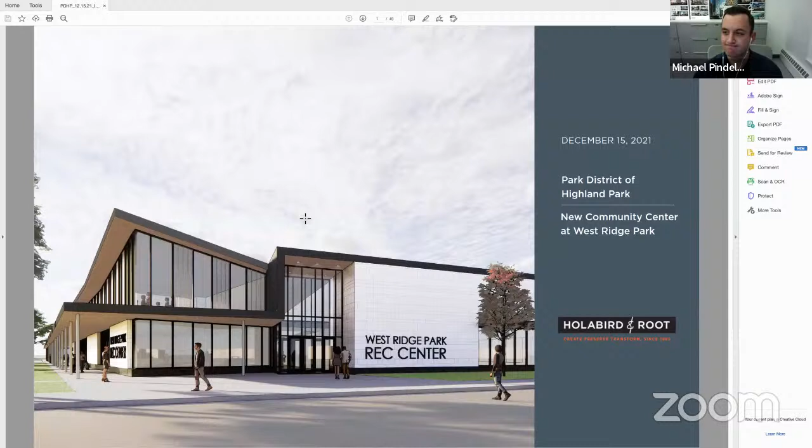Let's go to the next slide, please. So essentially, we appreciate the prompts that we were given, and we've reordered them a bit from the email we received. In our agenda for this evening, in the next 15 minutes we'll talk about our approach to working with the Park District, including engagement of stakeholders for both the site and building design.

We'll talk about our analysis process of the site, of the existing location or a different location. We're going to show you relevant examples, and then we'll head into the pros and cons for renovating the existing building, building new on the existing site, or building new on a different site.

Next slide, please. Our expectation is that as we go through this, if we need to double back on something, we can certainly do that. Essentially, our process does a number of things. In the multitude of boards that we work with, this is really a verification and validation of our approach and where we end up in the process.

So it is our intent to analyze all the different site options, and there may be some sites that you have thought about that we have not discussed or may not be aware of. We make sure we understand the overarching goals of the building and accessibility, understanding that those are influenced by the site. In our process, we look at development costs, traffic, community impact, et cetera.

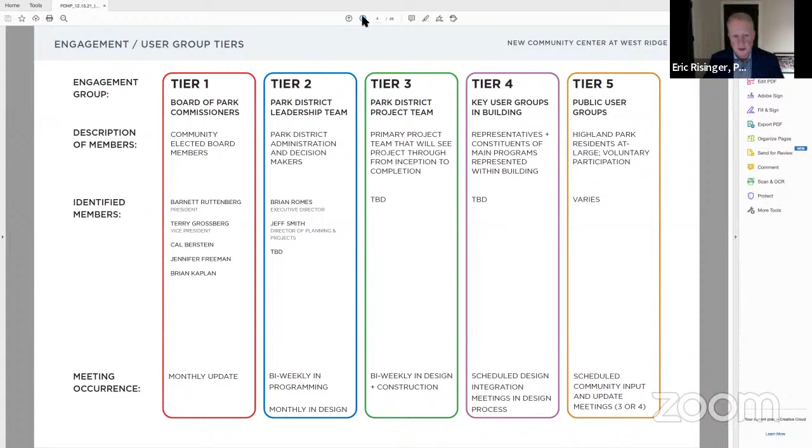Next slide, please. In terms of engagement, we typically break down our potential public client user groups into tiers. Tier one, as we see it, might be the park board. Tier two would be the Park District leadership team. Again, we're making some assumptions here, but this would be filled in completely, working with that key leadership in biweekly programming meetings, monthly in design.

In terms of the park board, it's really updating monthly, but in the initial phase there will be interviews, feedback, and a process where we want to understand the goals and the collective direction you would like to see, referencing the plan developed by the Lakota group, which was from 2015.

It would be our understanding it was probably started in either 2013 or 2014, with a draft delivered in 2015 and subsequently adopted. We want to be sensitive to past information, as maybe things and expectations have changed in the last few years with economic shifts, as well as the lessons learned from COVID that different communities and groups are sensitive to.

Tier three would be the Park District project team. Tier four would be our key user groups, and tier five is the public user groups. All of these involve a process of mining information through in-person meetings, workshops, and open houses, where we're making sure we're not only gathering input but presenting it back so we're building consensus.

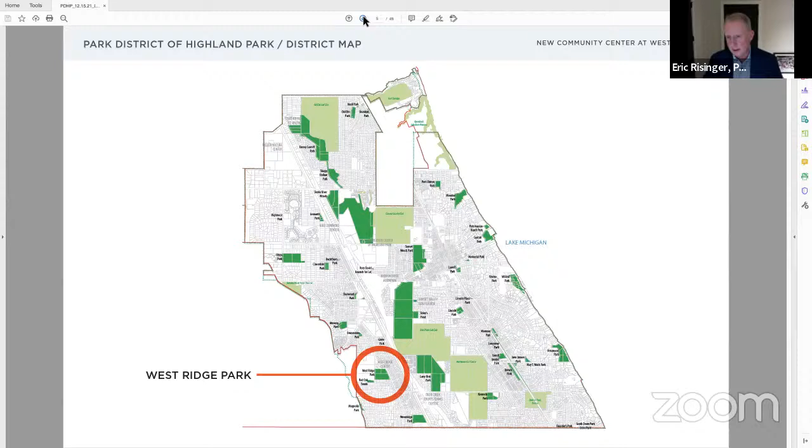So as we get into an example of what a site selection analysis and process looks like with Holabird & Root, we'd share a case study we just completed last year for Wadsworth City Schools. This has been a repeat client for us, ongoing. They had identified two years ago a need for a new intermediate school, and the challenge at the board level was: where do we build this? What site do we want to identify? And how do we do this?

We spent time to really understand utility access, roadway access, and safety of reaching these sites, because again, these are school-age children. So if they're walking here, how are they getting here? Are they walking with their families? This process, as we presented it back to the board, was really incredibly informative for them.

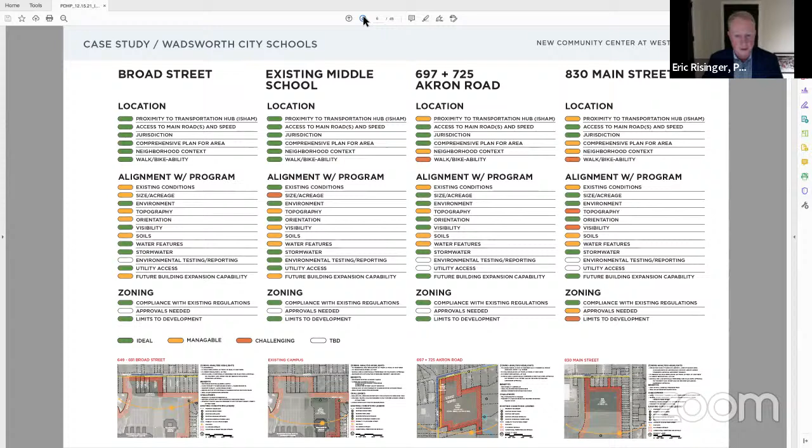So in terms of the analysis of the site, as we lead into the pros and cons: do we renovate the existing building? If we're doing new, do we do it on the same site the current building occupies, or do we build in a different location? In fairness, we do this all the time, and this is a big piece of the puzzle.

We've got to make sure we're verifying and validating information that the Park District for Highland Park may have already created in the past. We want to make sure that from a board level you feel confident in whatever decision we go down. And more importantly, the question is: how did we get here? Because a lot of times things happen and seem so intuitive, but in reality, given the start-and-stop reality of what COVID has done, we want to make sure we do that.

So what we're going to do with you this evening is take you through a very preliminary process of where we think this facility is located, and we'll give you our opinion on renovation versus new. But this is what we would typically do when working with the board. Next slide, please.

One of the things we do with all of our facility assessments—and you guys have one conducted by WT Engineering, which we have reviewed—is this: here's an example of an existing facility where we worked with the state of Ohio, and we had to verify and validate a report they had done in 2008 to determine whether the school would be eligible for full replacement. In Ohio, you have to hit a particular ratio of renovation dollars compared to new, and it's a fairly extensive process.

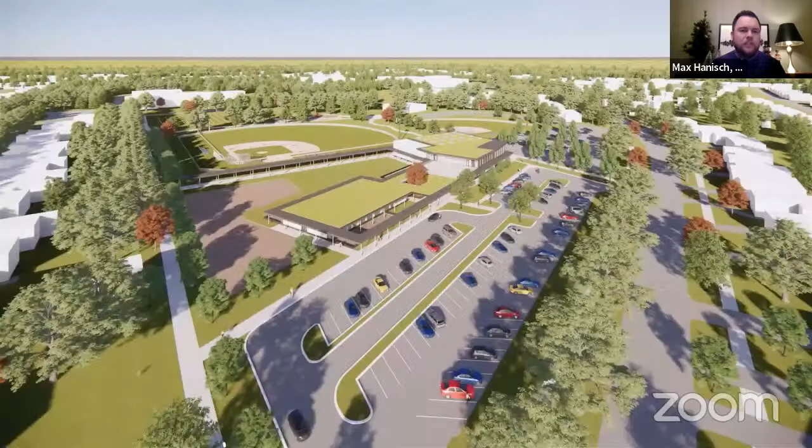As Eric was ending on the new master plan approach we proposed in our initial proposal to the Park District, we wanted to capture in its entirety what it's accomplishing with the holistic approach that was asked for, in its possible new layout—this kind of charrette or vignette of what could be. As we come along the south side of the park, what we wanted to showcase—and the video, I apologize, will be a little choppy based on the meeting platform—is an entirety of a building that sets the stage along the street front of the neighborhood.

It's an elongated, low building that has the opportunity to serve as a kind of community porch element. We'll see a couple of times how that building opens up to the street and to the pedestrian network. When we were on the site, one of the amazing things was those existing pedestrian networks that snake you through the site and along the tree lines. So what this building really seeks to do is strategically place itself amongst those pedestrian networks and find ways for extensions of the building to bolster those experiences.

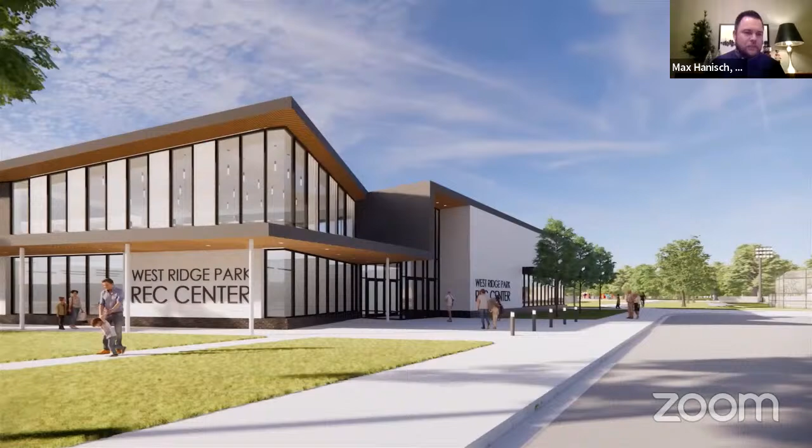So as we come into what could be a front approach to the building from Ridge, we'll take a slow pan along here and see the north possible rec entry to the building. We see the dance studios and the art programs up on the second floor, and that key administration space along the first floor.

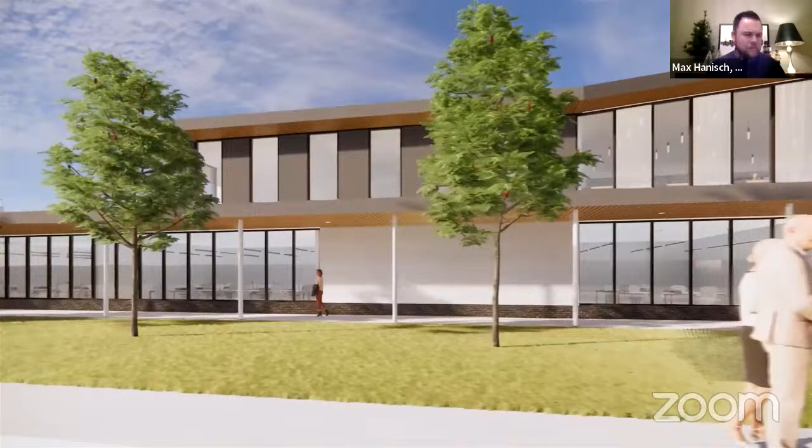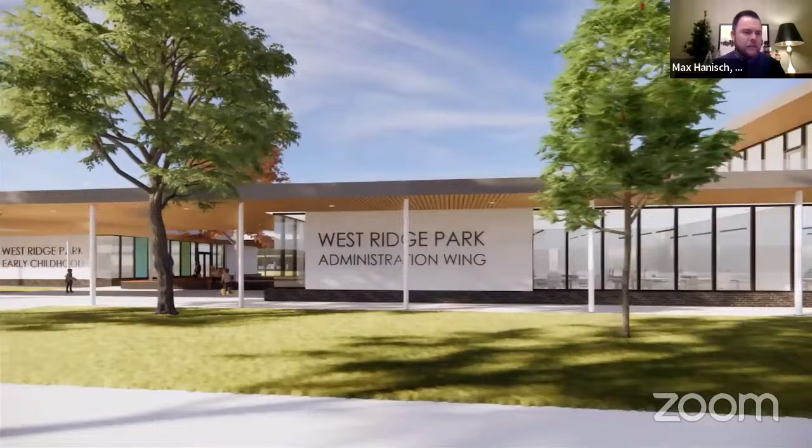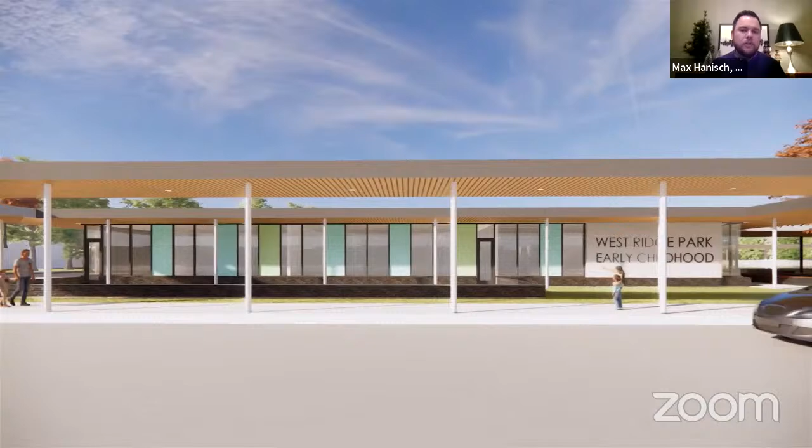As Eric was talking about, one of the integrated program approaches to this building is very similar to the multiple users that access a school building. We'll see here that breezeway open area of the building that allows us to have a natural break in space and have a dedicated front door, dedicated entry, dedicated building services to the early childhood center, making sure that we have the strongest supervision and safety and the ability for this to operate as its own entity.

And then as we move to the north side of the building, we can see into the gymnastics gymnasium that's positioned on the west side of the building, closest to the rest of the outdoor athletic programs, offering some possible flexibility between the gymnasium and the outdoors.

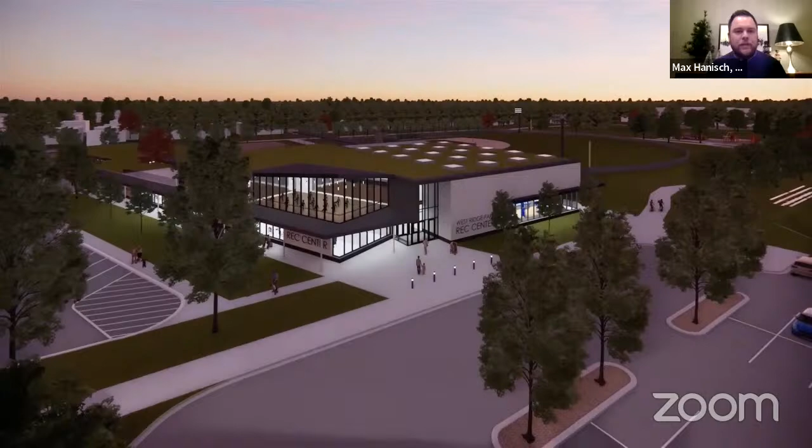And then finally, that main entry again that we're back at, that takes the covered walkway of the pedestrian network and starts to wrap that covered walkway up to become part of the integral architecture of this new rec center and community center. And then finally, as we pull back, we can start to see on the second floor inside that dance studio space that really has the opportunity to be kind of that beacon for the park district.

And I think all of the things that we've been talking about, whether renovation or addition or building new, there's a series of really good planning principles that Holabird & Root knows like the back of our hand: making sure new interventions are based in a pride of place, have supervision and safety thought through for approaches to the building and parking and access, making sure these new facilities cover all things wayfinding and landmarking with the multiple user groups on the site.

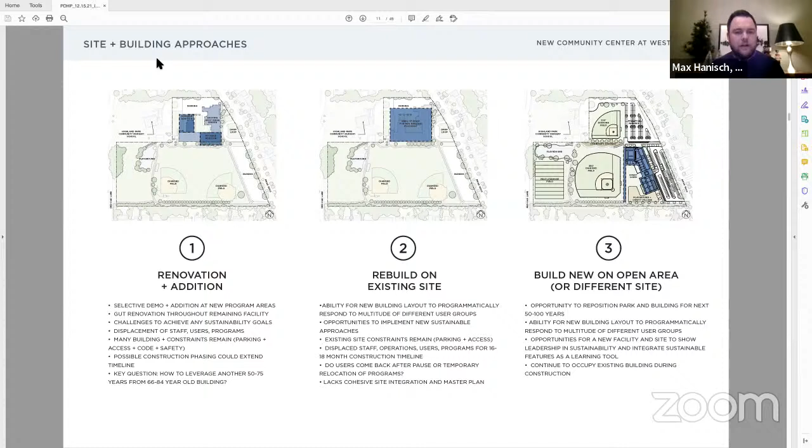Are looking for every opportunity for instituting sustainable measures, whether that's in the formal building or in the site approach and stormwater management, and using those really as a teaching tool. And then finally, the operations and maintenance, as Eric was starting to hit on, making sure that we are bringing to the team all of the possible mechanisms so that new operations and maintenance are going to be simple and efficient for the district.

Thank you, Max. And I think what we were trying to do is outline for everyone here our process of working with you: the verification and validation of data, looking at the real dollars, looking at a comparison and benchmarking of energy modeling of new versus existing. So this would be the process that we would work through.

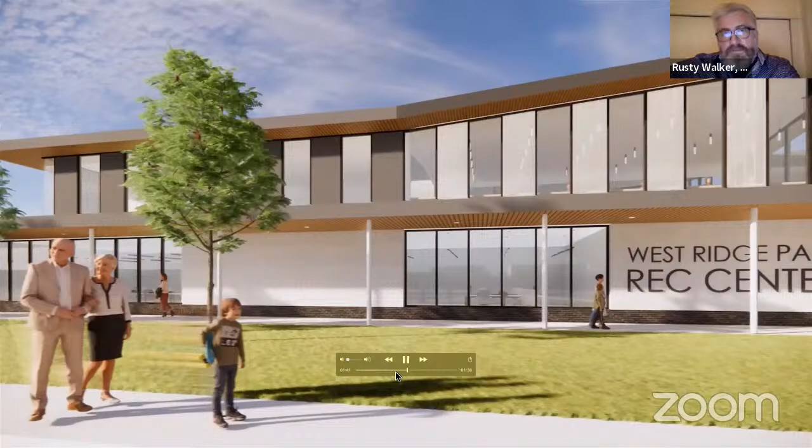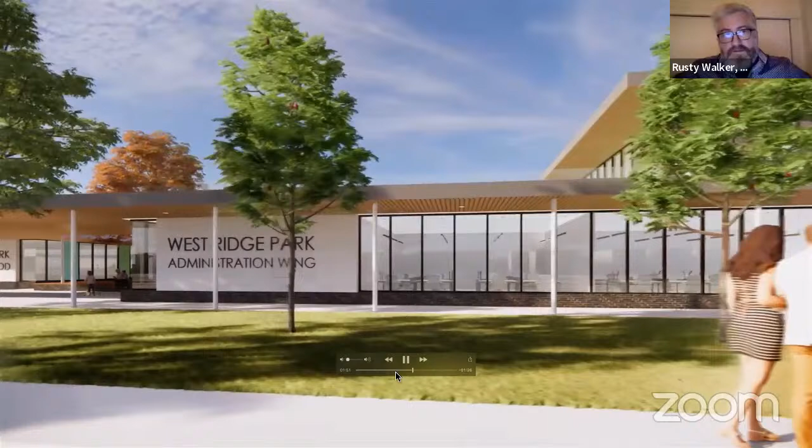Okay, can you keep going? So what you're seeing is the artist loft on top—the dance studio and art studios sit above as a loft. The administration and conferencing is below. You can also see this concept of an outdoor classroom, a porch. The whole building is united by this low sweeping porch, or arcade, right here.

So now am I looking west? Still, yes. All right, so we have the administration—some of the folks on this Zoom right now—this would be where they'd be housed. Got it, okay, keep going.

We did that so the administration is sort of a passive supervisor for the early education—not actively, but they're able to survey and control the site from there. Right, so now we're in the old parking lot. Yeah. Okay, now I've got a better sense of it. Keep wrapping around, so now we're still looking west, and then it's gonna loop around.

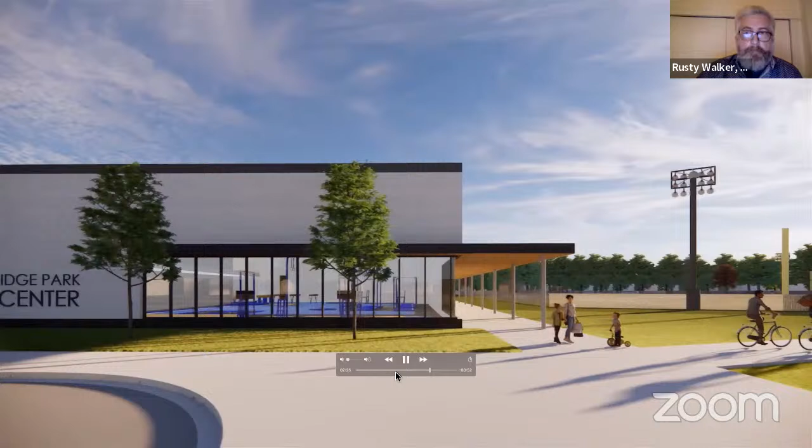Okay, now we're looking north again. Is that what—south? Okay, stop it for a second. Oh, I see, so now we're on the other side of the building, on the north side looking south. Exactly. Okay, this is where I lost you. Keep going—animations can be a little disorienting.

Okay, so there's a parking lot now that allows access to this north entrance. Right, that's the recreation athletics parking lot that's going to have to accommodate big events, small events, and daily uses, so it's separated for that purpose.

Okay, so unequivocally, you are recommending that we take this down and build new in this new spot. We are. And I think it's important to add that when we designed this during the design charrette or design competition, we built a cost model. So we're recommending something we believe you can afford based on your budget, and that's something we do because we're principally school designers. School districts, I'm sure you know this, do everything they can with paperclip and bubble gum, right? And that's what we do. But we make it beautiful, operational, and maintainable. We're very good at figuring out how to get a great building and a rich program out of a modest budget, and we don't show you or promise anything unless we know we can deliver it, so the cost is realistic.

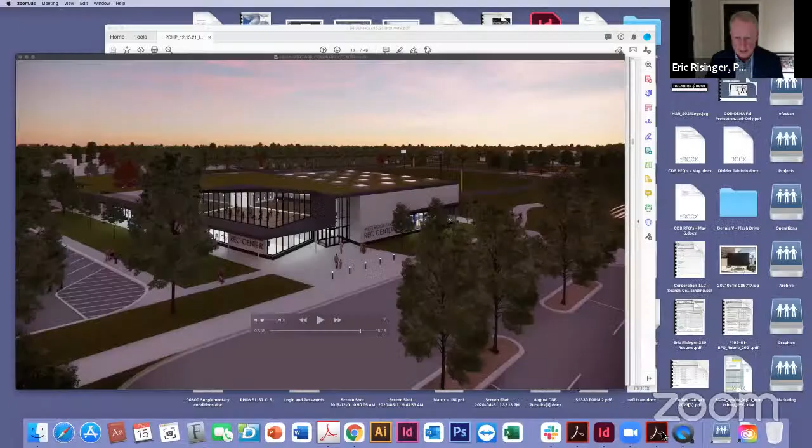Yeah, Cal, can we go back to the animation? We just want to show you something pretty impressive. The park was absolutely part of our design. Mike Pendelski, can you call that up? And if you can go to the aerial, that would be important.

Yeah, at the beginning just swing around a little bit. Hold right here—two things are occurring. We have the event lawn—Mike, if you can circulate on the event lawn. So we have the event lawn, which is critical. Mike, just put the cursor on it.

Right now we've already anticipated a controlled outdoor environment that could be programmed by the park district, which could be amazing. We have the playground, the event lawn, which we're putting in almost every one of our projects. At the same time, that west covered area—what we love is, because we've all been outside when it's snowing watching baseball, now you could be under the roof. In summertime when it's really hot, the sun was amazing this past year, you can be in shade watching the baseball games. Mike, now just let the animation play.

What has been really impressive for us is acknowledging that. So Rusty, do you want to add anything to that?

Well, you have a beautiful park, and what we wanted to do was preserve all the things we thought were beautiful and successful about it. We all went for a walk around the paths, and they're amazing. That was one of the informing components of the site for our building concept—that our building would organize and connect all those pathways and experiences, as well as preserve the beautiful little park. I don't know, Max might know the name of it. I can't remember the name, but that's a special little space, that park over on the west side.

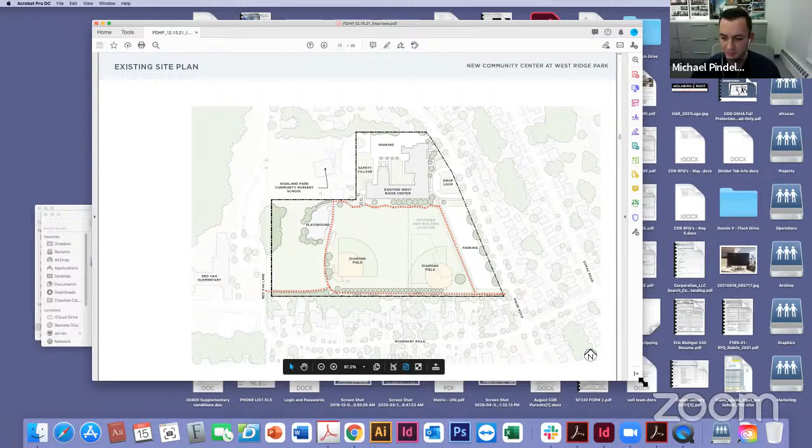I don't know if I can tell you the percentage, but Max, why don't you just pull up the site plan and we'll show you where we repositioned it. Mike, can you pull up the site plan in the appendix? Are you looking for the existing site plan? No, the new one. It's just a couple down from that. There you go, this one right here?

Yeah, there you go. So the interesting thing about the site plan layout is that we've really swapped building footprint locations. Where the old building was, the diamond field and additional lawn gets implemented. The event lawn may be equal. The one thing that makes me hesitate a little is we're showing an expanded athletics parking, where the first number on the top side of the site plan shows accommodation for the multitude of new users we're expecting to come to the site.

But all of that needs to be balanced, it's not a further study, just a guess. Sorry, Max, go ahead. I think that's really the summary, Rusty - there is a small increase in parking on the site, and a little bit of green space is converted to pavement, but I don't think this is necessarily the final solution without additional data.

Through the new field designs, we have the proper orientation for the fields now, which we feel good about, as well as the opportunity to rethink the watershed and water management on the site. But these tree pathways and the park, we worked to make sure all that is preserved because we think it's unique and beautiful for the park.

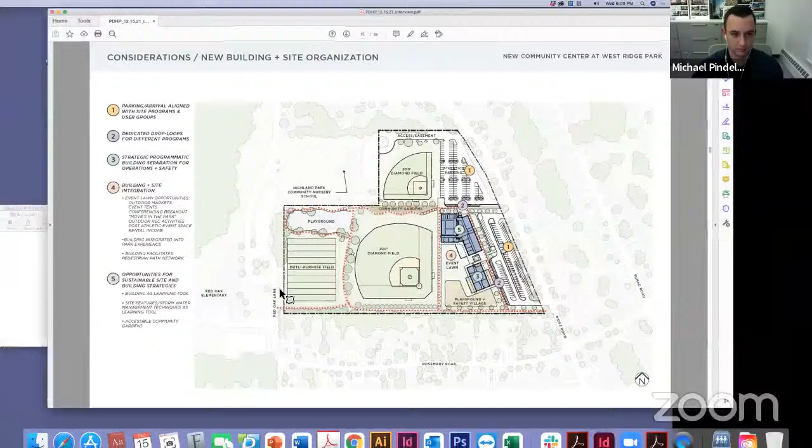Well, let me ask it a different way - is this materially bigger than what we have? No. What we did was, we took the recommended program that we received and integrated that program. Mike, can you give Max control and he can just go to it? Oh no, it's okay, this is good. But essentially, we're looking at about a 44,000 square foot building here that we think works more efficiently with what you need. I don't know the exact square footage of the existing facility.

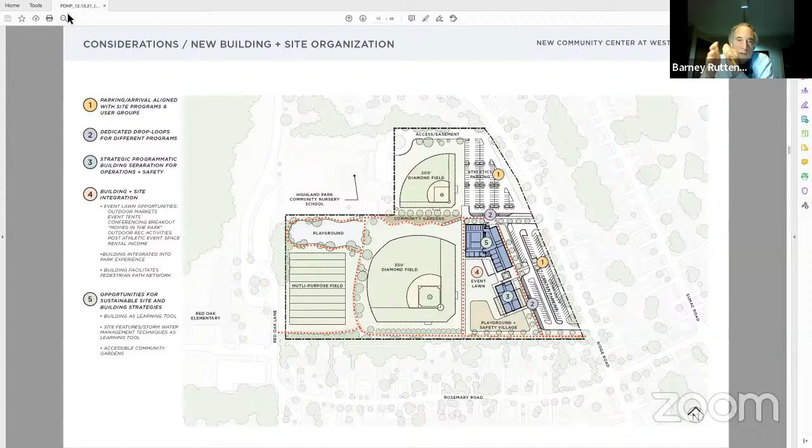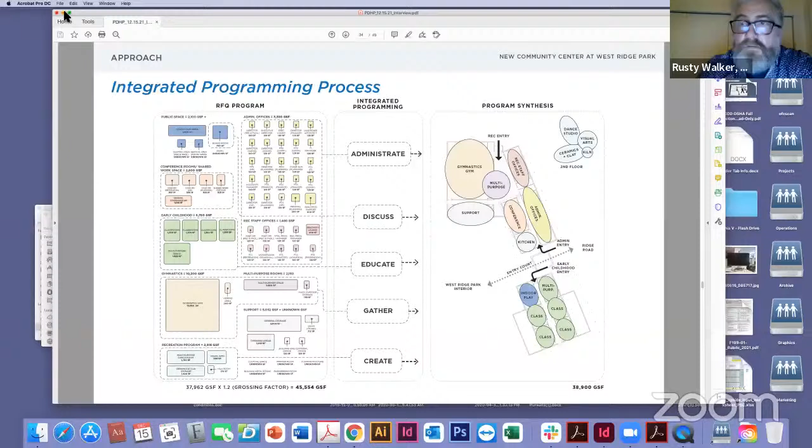Okay, well that's fine, but let me ask: are you programming it to have a basketball gym, or just a dance studio and a gymnastics facility? Currently, as the program requested, we have a gymnastics gym sized in there. Could you raise the height of it potentially and have the versatility? But because of the equipment gymnastics requires and the specialized flooring, switching that building around might be a little challenging. But if that is a program addition you want to study through the design phase, certainly we would look at that with you to see how we could accommodate it.

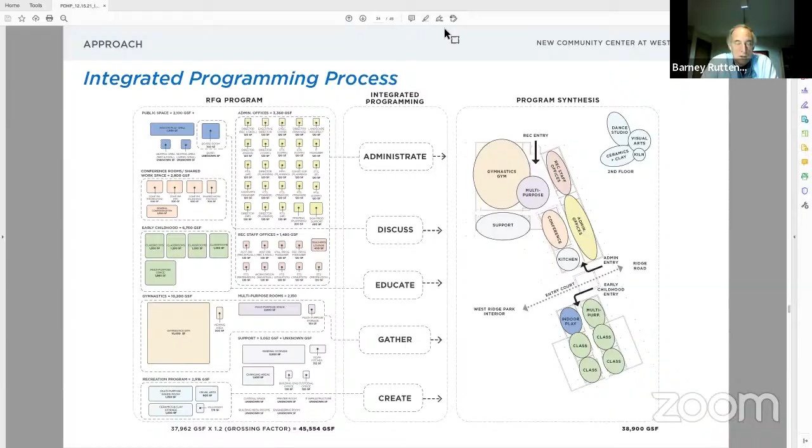Okay, well gentlemen, and I know there are some ladies we didn't hear from, I want to thank you for your presentation. I don't have any other questions. I think it's a really great concept you're presenting to us, and we appreciate the time and explanations. I hope you didn't think our questions were too baseline. No, they were great, they kept us honest. Well, that's the job we all have.

Go ahead. Great, thank you Brian. I'm going to share my screen here. Thanks everybody for having us today, back again to talk a little more about West Ridge. You can all see this, correct? Perfect. As you mentioned Brian, we're here today - Andy Tinucci, joined by Brian Foote and Heather LaHood, as well as Don Matthews from Gewalt Hamilton. Same team that presented to you at our first interview, so we thought it would be nice to bring back the same group as a follow-up. We'll keep this initial presentation brief so we can spend most of the time in the question and answers.

What we really wanted to say is that we think architecture is a service. We feel we distinguish ourselves based on the quality of that service, the level of care we provide in our work, and our thoughtfulness. A lot of that care we bring is a care about your mission. We feel that's evident in all the work we've done for public institutions over the last 30 years. I know there's a question on the table right now by the board as to whether or not you should be defining what this project is for us - is this a renovation project or new construction? I don't think it's critical right now for you to be defining that for us.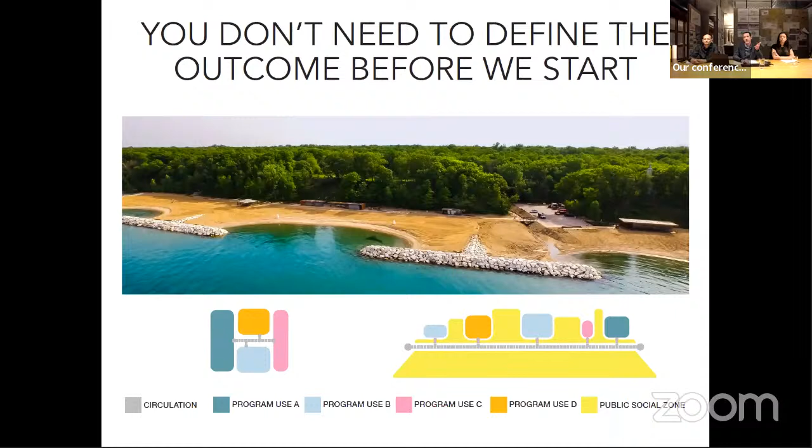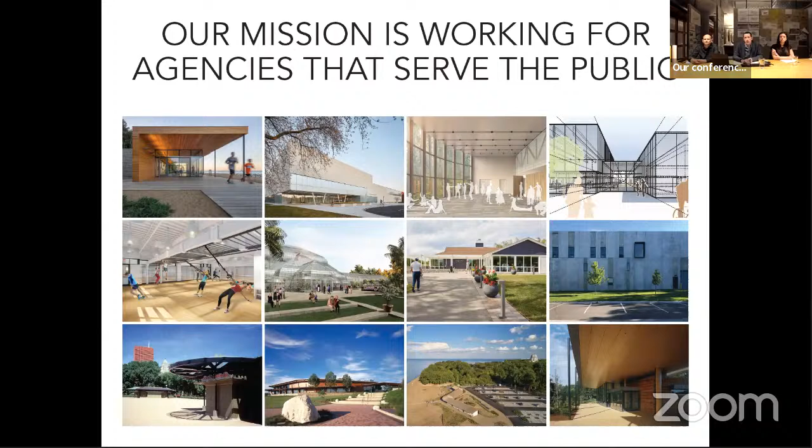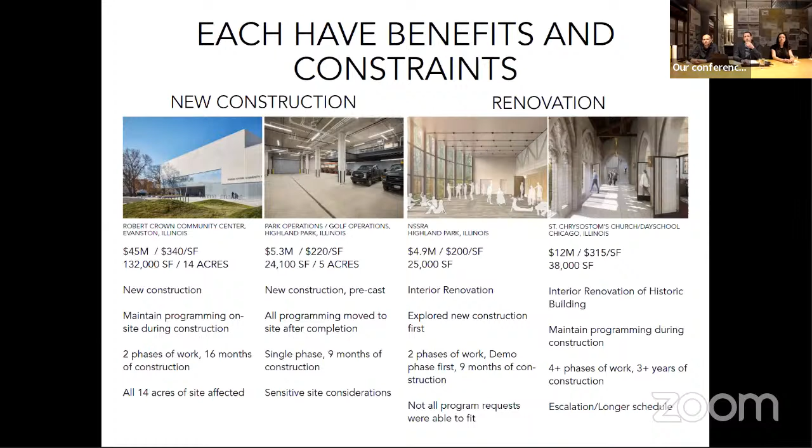I think it leads to much better outcomes, as evidenced by Rosewood, when we don't define the outcome before we start, and we let the process and the product develop through that collaboration with you. Our mission over the last 30 years has been to work for agencies that serve the public, agencies just like yours, and we work on both new construction and renovation projects alike - it's 50-50 in our business. Each has benefits and each has constraints, so whether you're working on new construction or renovation, they come with pros and cons. We want to spend a bit today talking about pros and cons, and we can circle back to any of these slides in the Q&A. With each of these projects demonstrated here, it wasn't a foregone conclusion when we started as to whether it would be a renovation or new construction. We went through a process with our clients, over a short or long period of time, to determine what the final outcome would be.

Just to jump right into it and to get more specific, if we had to list the pros and cons of new construction versus renovation: one pro of new construction is that you can design a facility that's perfectly functional for what you're trying to do. When you think about gymnastics, you can design a facility that's exactly the right size, the right height, with all the right mechanics for the uses you're trying to achieve.

New construction is often easier because you start from scratch. You have cost confidence and schedule confidence. You generally know what you're going to find with new construction, more so than with renovation when you start digging into an old building.

Also, we should consider life cycle costs and maintenance costs. When you start with new construction, you'll reduce your long-term maintenance costs and life cycle costs because you'll have the latest systems and the most energy efficient building possible.

Interestingly, across the bottom you'll see the same for each of these pros and cons of new and renovation: optics are often a pro and a con of any kind of project. With new construction, one of the pros is its optics—you spend a lot of money for your constituents and give them something brand new. The cons: there's a lot of waste with new construction.

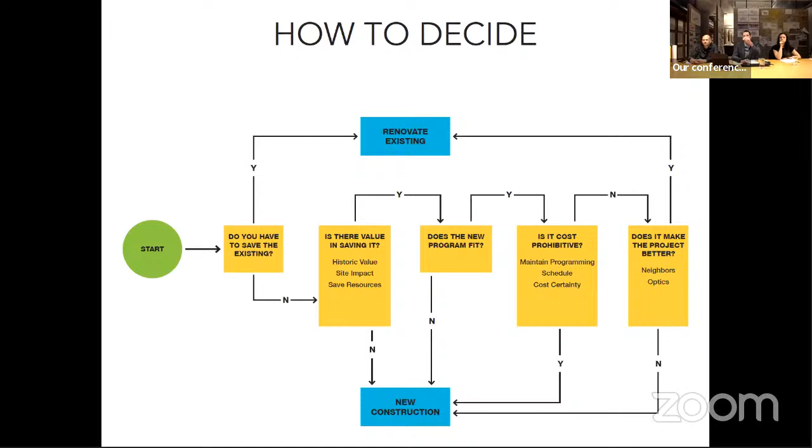We've done a little digging with the help of Amalia Schwartz into the existing facility to see if that existing West Ridge is something historic. A portion of it is really quite old -- the original schoolhouse to the north is from the 1920s, but the majority of it was added in the 50s.

It was added by architects Bertram Weber and Childs and Smith, both of whom are known, but neither of whom are regarded as incredibly significant architects in the Chicagoland area, though they do have some history in Highland Park. So those are things that we can dig into as well.

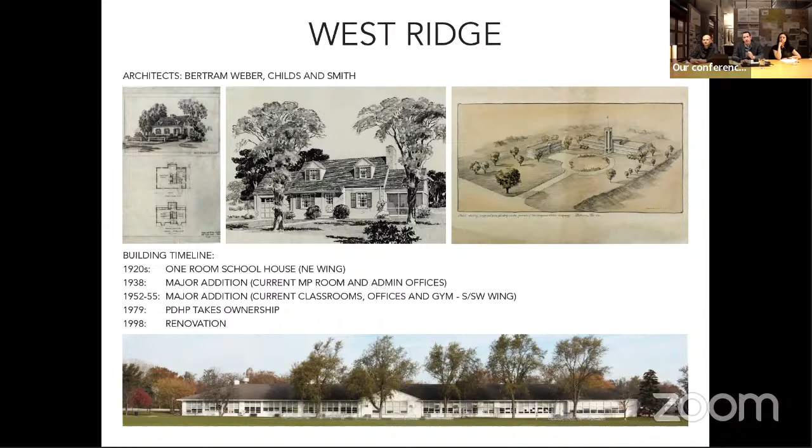Ultimately, though, the question is, how will we work with you? I think we're starting to get to that as we talk through these decision matrices. And that starts, especially with us, in a collaboration without preconception.

As demonstrated by NSSRA, a renovated project we just finished in Highland Park, our journey with them started almost a decade ago when they contemplated a building in Highland Park just behind Sunset Foods -- you'll recognize that octagon shape. They contemplated a building in the park, and I can remember being in meetings with former director McElroy thinking about this building with NSSRA.

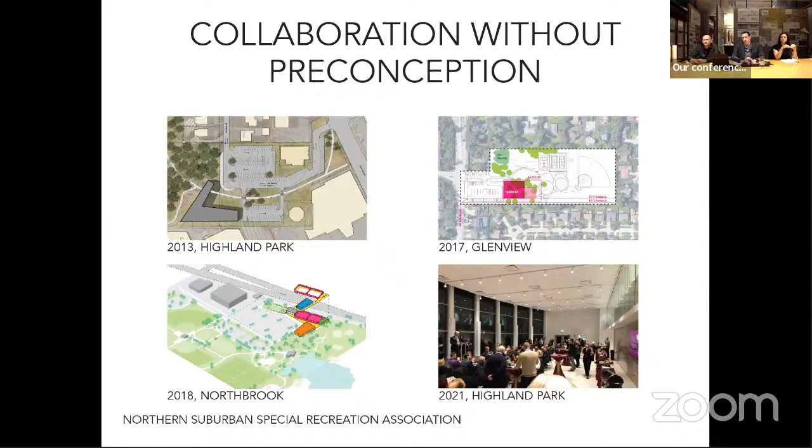That didn't work out, and in 2017 we looked at a site in Glenview with the Park District where they could potentially build a new building. Then in 2018 we looked at the Northbrook Activity Center, a project that we bid on and didn't get, but that partnership with NSSRA fell through. They had contemplated going into that facility with the Northbrook Activity Center. Ultimately they landed on the facility they're in currently, which we renovated for them right on Lake Cook Road across from the Botanic Garden.

As we've mentioned, we'll work with you to develop an engagement plan with the public. Really these questions we'll ask are, when should we engage the public and how should we engage the public? Should we engage the public early, which is a great thought but also comes with challenges, to understand their ideas and reservations as a way of understanding whether we should be renovating or building new?

I should also mention that with the Evanston Crown project, there was a stakeholder group called the Friends of Robert Crown. It was a private fundraising group we worked with closely, which ended up raising 25% of the funds for the project privately. With West Ridge, there might be other parts of the project, like the fields, where we could similarly engage the public to achieve more program than we initially anticipated.

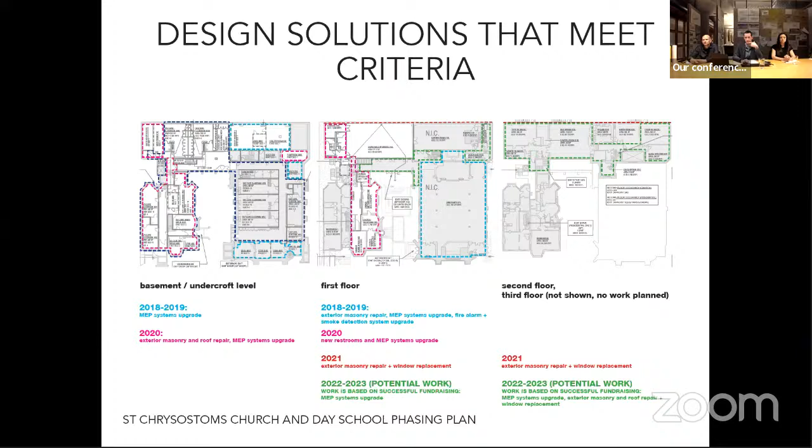Or, as we did with Robert Crown, we'll think about where on the site we can place the facility so that it either leaves the existing building in place so programs can be maintained, or consider putting it on the east side. I don't think the east side is actually the best place to put it.

Because I think the neighbors across the street are really used to looking across at the park. And I think seeing from Ridge Road the programs, the parks, the play fields, perhaps the gymnastics, could be more lovely. But could the building be on the west side of the park? I think that could be quite interesting to explore.

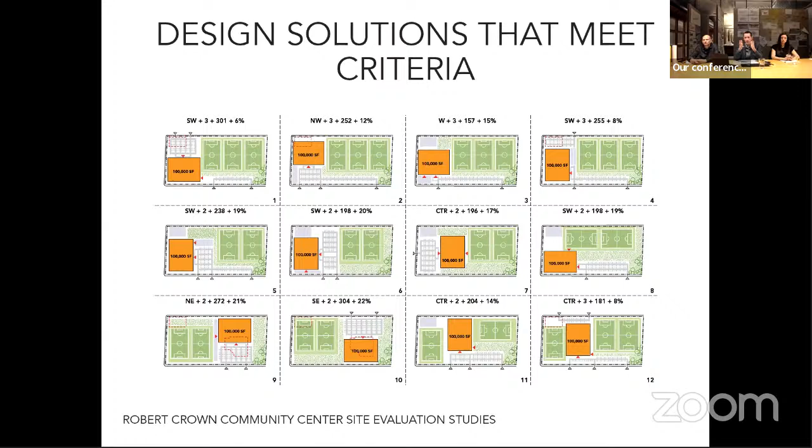We did this at Robert Crown, where we moved the building around and evaluated the options. We came up with selection criteria, looked at all the various options, went through and made pros and cons lists for each, and ultimately landed on one of them based on that.

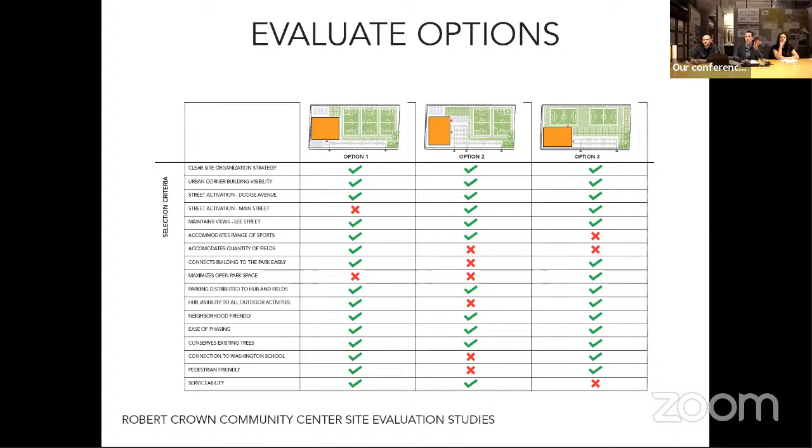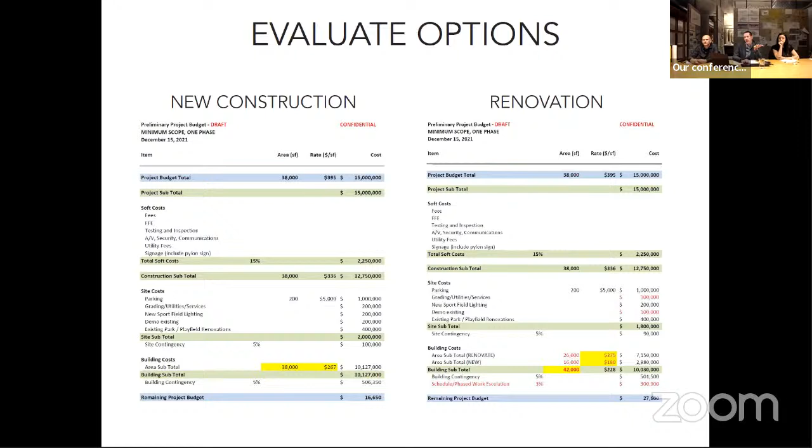Of course, one of the things we have to do is evaluate cost. We can get into this in more detail, but we've looked at the potential costs each of these projects could be, both as a new construction project and as a renovation project. And again, as always, there are pros and cons - we can get into that in more detail if you're interested.

We have the most ability to control cost early in the project, and it's essential to do so. Making these decisions early is paramount - we have the most opportunity to do this early, as opposed to later, when changes increase costs. So we really want to make all these investigations and decisions now.

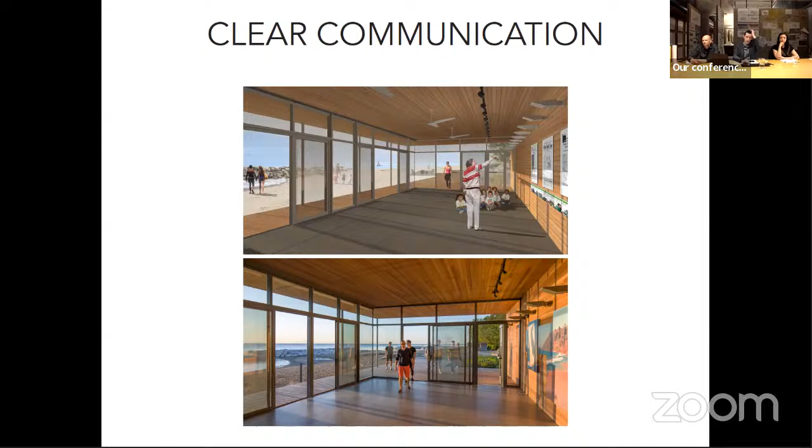We're very proud of our ability to communicate clearly. We'll communicate clearly and often. We'll draw lots of drawings, build models, and those models and drawings need to be incredibly accurate, so when we engage the public and you with them, you see what you get - like this image of Rosewood before and after, almost identical. And we need to maintain that commitment all the way through. This is where we think we stand out - we are just there with you, and we will be there with you. I'll be there with you.

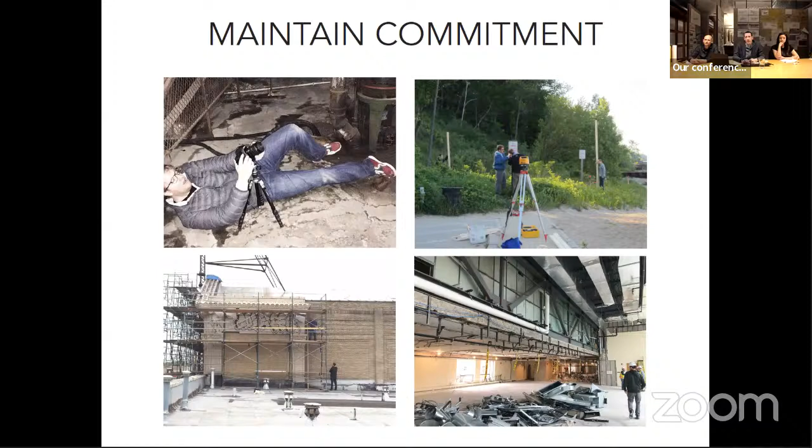I think we'll get into more specifics on Westridge, but we've done some quick programmatic overlays of the existing building with the new program. I know we have to vet the program and go through this programming exercise to fine tune it, but there are some challenges that the existing facility presents.

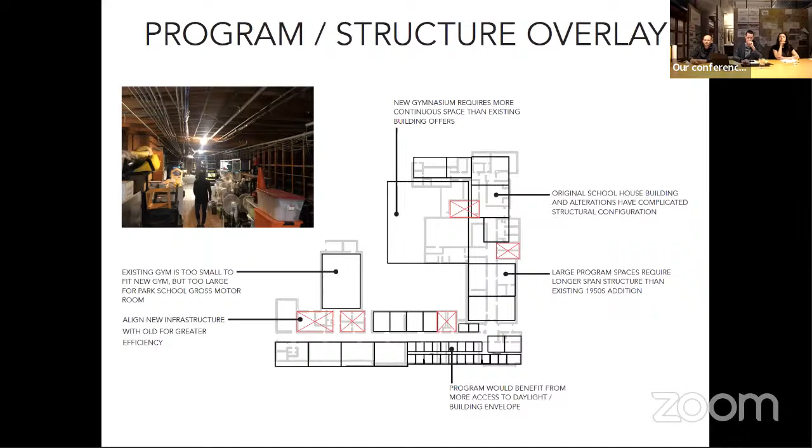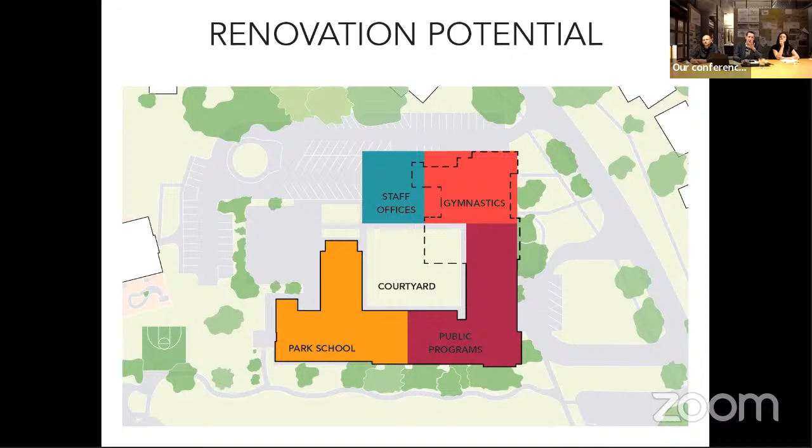Looking at potentially how that could play out as a renovation project. We don't have it designed, but there are some initial thoughts, which is ultimately just to say that we know that change is challenging.

Change for your community is challenging. Change always causes a little bit of consternation among your constituents. We can help be the buffer between you and your constituents, and we can lead that process so that change ends up meaning success. Success for the district, success for the park, success for the neighborhood. And the way we think we achieve that success is by letting the project reflect your mission, really be demonstrative of your mission now and in the future.

So I think with that, we'll turn it over to you and start with any questions.

So in our initial interview and in the initial projection, we thought the new construction building would go generally in the place of the current building. We proposed that because we thought it was the most fiscally responsible thing to do, and we thought it would be the most appropriate thing to do as a neighborhood response. It doesn't address the existing programs in West Ridge particularly well. And if we needed to, we would want to think about a new location for the building, and we have some thoughts on that.

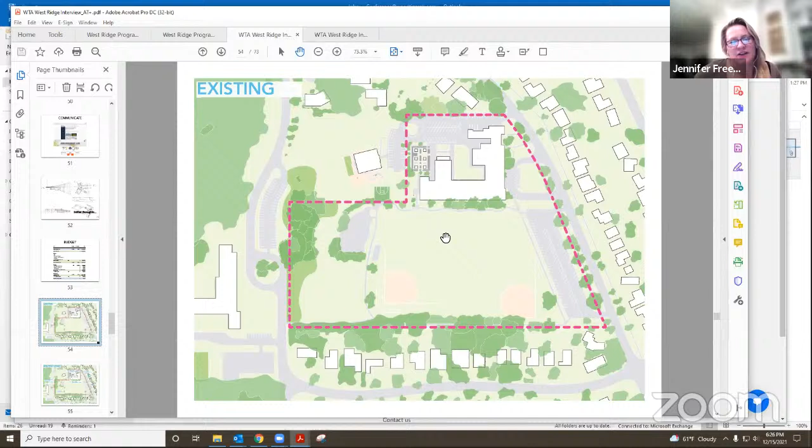So what we presented, actually, I like the idea of sort of moving it around, and you said we can pivot and check out different spots. So rather than press you to a specific plan, I was interested in hearing why you would move it around the property. You said you had some thoughts about that. Sorry if that was a bit of a static question, but if you had to open the thought process and the world is your oyster, what would you do?

Yep. So here's the existing site, and here's what we call site influences. Here's a big open existing site, a blank canvas. What do we have to do? We have to be mindful of having $15 million to work with, but we know we can do a project for $15 million. We just have to use slider bars and determine where we're going to apply the resources.

We have neighbors who know there's a building over here. We have neighbors who are very used to a view of the park. We have neighbors with a nice vegetated buffer to the park on the south. We have a lot of more institutional buildings on the west.

So our initial proposal was to think about the building being in its existing location. But if we had to talk about a building being in a new location, I think the west side might be a more interesting location than the east side, because a building on the east side would block the view from the neighbors, and not to mention would push the building further into the site and tighten it. It would be very small up here, hardly any room for a soccer field.

Maybe you could fit the smaller baseball field in up here. But if the building were back here on this side, you would have much more room for fields on the east side of the park.

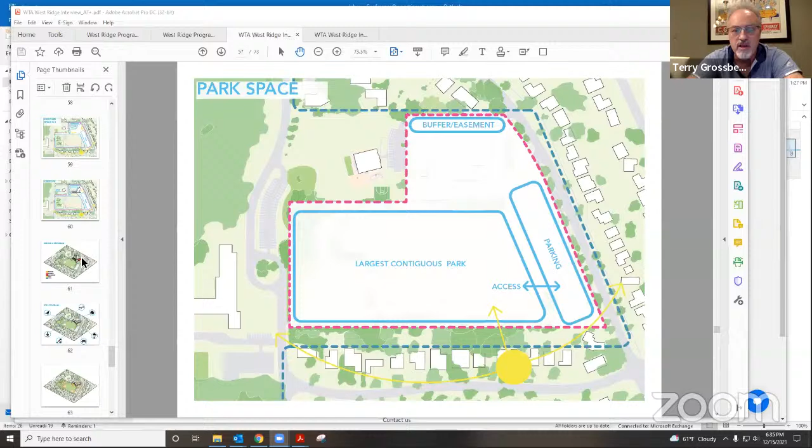Yeah, absolutely. I'll just use the initial presentation to demonstrate. The early childhood program that's there, we understand it's not DCFS certified, state certified preschool. I do think it would be interesting to talk about designing it in such a way that perhaps it could be in the future, so you'd have that flexibility. As such, we should be thinking about security so they can be safe. But yes, they should be privatized in some way, down the end of a hallway, for example. So in either a renovation scenario or new construction, you would not want to walk through the early childhood area to get to something else. You can't landlock a program behind early childhood anything. So early childhood either has to be its own arm out to the side, or the end of an arm.

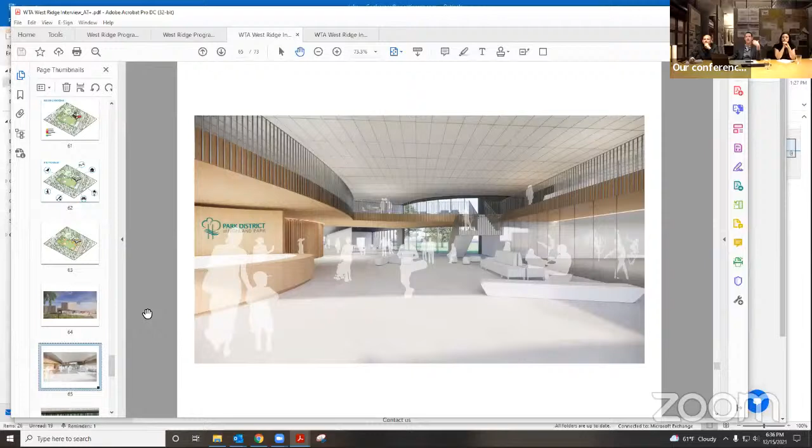Also, first of all, we think the combination of programs really makes this building. We call that area in the middle the social heart. That was one of the drawings we drew initially that we're so excited about for a new facility. How do you get that mixer space where people are moving through, where you can walk through and see gymnastics, have the boardroom right there, and have early childhood with pottery on display in the distance? That social heart, that mixing center, is the social condenser that's so exciting about a building like this. But you have to be mindful in that programming that there's a staff space here, and you want the Park District staff not intermixed through early childhood as they are currently. You want them to have their own space so they can function, but then everyone should have their own beautiful access to this beautiful park. You don't want any one of them to be forgotten and off on the side.

So that's a long answer to your question, but yes, absolutely, we should be really sensitive to how we design it. We've designed these preschools before, even though this isn't a certified preschool. We'd love to talk to you about potentially designing it in a way that it could be in the future, which means things like safety really need to be considered with the program and the design. Thank you very much.

Terry, I'm sorry, you're done asking questions? I am. Okay, thank you. All right, Calvin?

Yes, can you hear me? Okay, I apologize, I lost a little bit of Terry's Q&A. My internet went out—the power just went out across the street from me, and they're saying it's unstable. Brian Romes, can you please circulate the call-in number to all commissioners in case the internet goes down at anyone's house? Don Matthews just texted me his internet and power just went out at his house too. I'm sure Dan Johnson is on it—we have one of the best IT guys in the business. Andy, thank you, nice seeing you again. Hopefully I can get through my Q&A without losing internet or power.

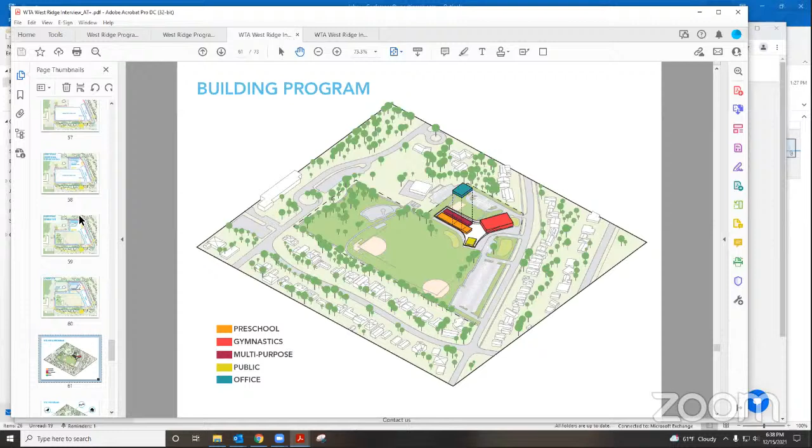So, can you talk about this? It sounds like your preferred concept is to keep the building within the existing building envelope, the existing footprint, or close to it. Do you anticipate any issues with the neighbors, the single-family neighbors in the area?

First of all, it's not so much that it's our preferred concept. It's that when we were initially asked to think about a new building, we thought this was the most appropriate place to put it, for a variety of reasons I'll explain. But it's not necessarily our preferred concept—it was just our initial concept. It's obviously not sensitive to maintaining the existing program in the current facility; we would need to solve that, and we don't have a solution for that yet. So that's where the conversation about moving the building elsewhere on the site comes in. The reason we thought a new building could go here is actually in part because of the neighbors.

Going back to our influences slide—there already is a building here. It's small and humble, but it's a 40,000 square foot building. We think we could design a new building in a similar way: low, appropriately scaled, in a location where all the neighbors already expect it. We think we can design a better park building there in a few ways. The reason we initially positioned it here is because your south and east neighbors are used to a building being here, and they would keep the building there. Your northern neighbors are also used to a building being here. In our proposal, we'd design a better park building and return some parkland here to the north to those neighbors, opening up more of a view to the park for them after the building was done.

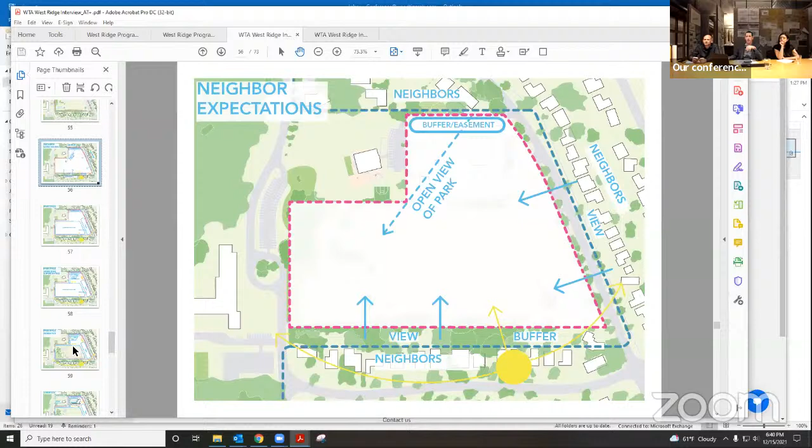So we walked through these steps to talk about all these influences. This kind of new, low building in a similar location has the benefit, from a cost standpoint, of utilizing a lot of the existing infrastructure, which we think is sensitive and wise—placing the building where the neighbors already expect it, but giving a little more parkland and buffer to those northern neighbors to improve their current situation.

Got it. Okay, Andy, I really liked the architecture of the Crown Center in Evanston—I think it's a very attractive building. How do you balance the competing goals of creating an attractive, architecturally interesting building versus community members who think you're spending too much money on architecture and being frivolous with taxpayer money?

Ooh, that's a loaded question. The way you do it is you design a building that's perfect for the site and utterly demonstrative of your mission. So how do we design a building that's perfect for the site? We make it a better parkland building. The existing building is fine, and there's some charm there, but it's utterly opaque—you really can't get to it, you can't get from it to the site particularly well, and there's no significance of arrival, hence the kind of ins and outs of this building.

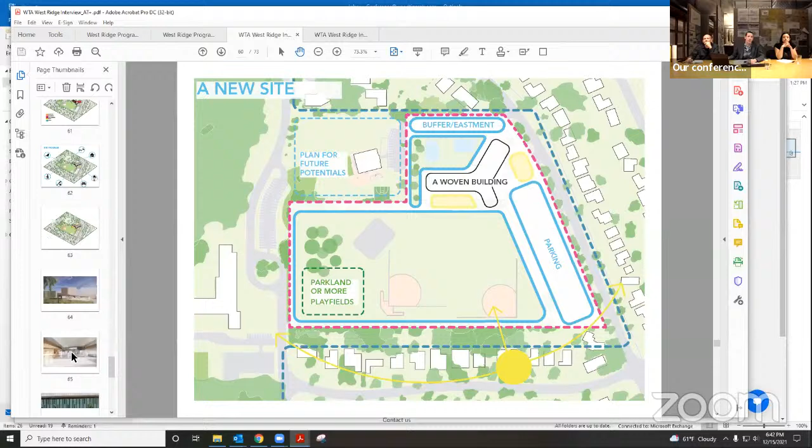In this kind of proposal, there'd be a more appropriate drop-off with a low building, a long overhang or porch where there's outdoor space, where the interior program flows to the outside. This could potentially be done with either a new project or a renovation project, but those thickened edges, those porch spaces, are how you design a more appropriate park building with interior-exterior connections—not an excessive waste of taxpayer dollars, because of the additional benefit and program: outdoor space where ball players, in the event of a windstorm or lightning storm, could run underneath cover.

I could talk for hours answering this question, Cal, so I'll stop there and maybe you could make sure that I'm on the right path.

Yeah, no, you're on the right track. I mean, I think the only other thing I would add to it... oh, sorry, Cal. Go ahead. No, go ahead.

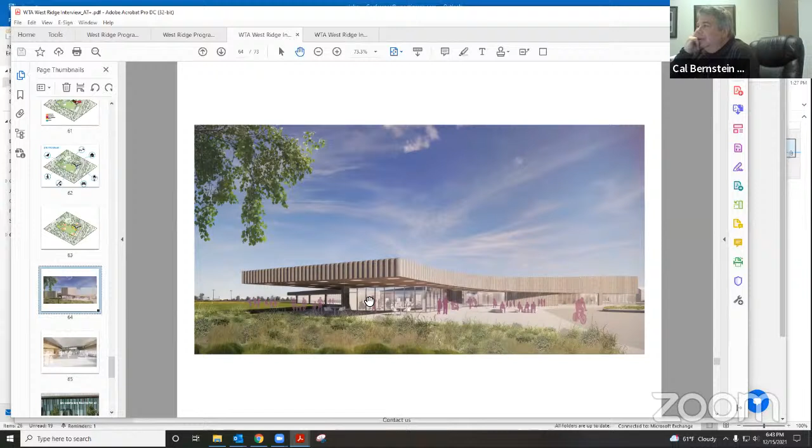Sorry, go ahead. The only other thing I would add to it is that it's ultimately a communication question. We're going to be communicating to you, to the neighborhood, and to the general public the value of the new building and what it's bringing to your constituency, but also where it falls in line from a budgeting and scheduling standpoint. We'll be able to put it in context with other peer buildings across the area, buildings we've worked on, so you understand the cost per square foot and similar details—so you can see that getting good architecture doesn't come with an extra price tag. We'll communicate that throughout, from the very beginning, and update it along the way.

And what are your thoughts regarding the site? As you mentioned earlier, there's a more institutional use to the west, and on three sides you have moderately priced single family homes. What is your vision for integrating this commercial building along Ridge Road when it's basically on a peninsula surrounded by single family homes?

Yeah, that's an awesome question. That's why I think either this site here or the west site is the more appropriate location. The neighbors appreciate the park, not a building or a parking lot, so keep it low and keep it open. I really don't think a building to the east along Ridge Road is the more appropriate thing, because it makes the parkland the back of the building. We would never design a building with its back facing the park—we'd always want it to design itself to the park so the two things are integrated. That's what our architecture is known for, integrating buildings with parklands.

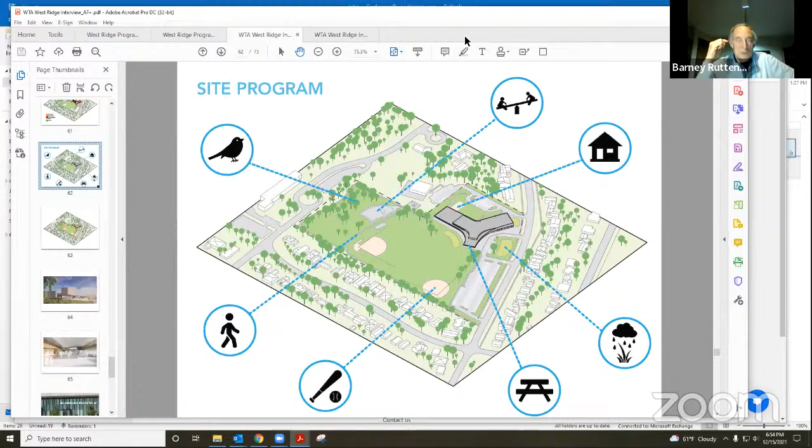All right, Executive Director Romes, is there any other business? There is no other business, and I will note that there are no attendees at the meeting regarding public comment. Okay, so I don't have to read all that stuff.

Is there a motion to go into closed session pursuant to the following section of the Open Meetings Act, Section 2C1: the employment, compensation, discipline, performance, or dismissal of specific employees, specific individuals who serve as independent contractors in a park, recreation, or educational setting, or specific volunteers of the public body, or legal counsel for the public body?

Yes, so moved. Is there a second? Second. Okay, Roxanne, would you please call the roll?

Commissioner Bernstein, aye. Commissioner Kaplan - say yes, nod your head Brian - aye. Commissioner Freeman, yes. Vice President Grossberg, yes. President Ruttenberg, and I say aye.